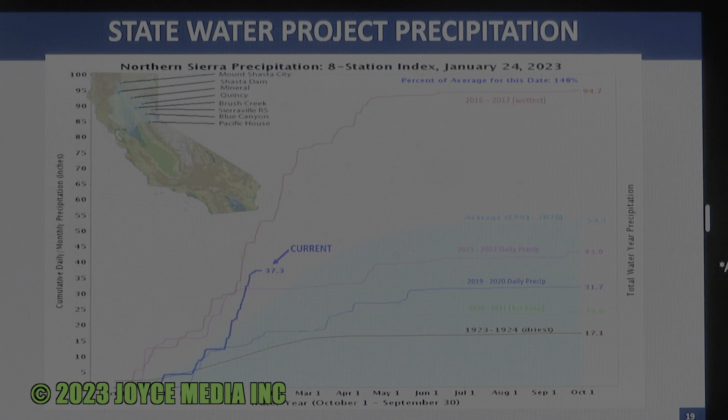Backing up a little bit. One slide, there we go.

All right, this is the Lake Oroville level. You can see we're currently at about 2.2 million acre feet of storage in Lake Oroville. We're currently 62% of total capacity. This reservoir holds about 3.5 million acre feet, and we're at 62% of that. We're a little over 100%, at 109% of historical average for this date. So things are looking pretty good in the Lake Oroville storage.

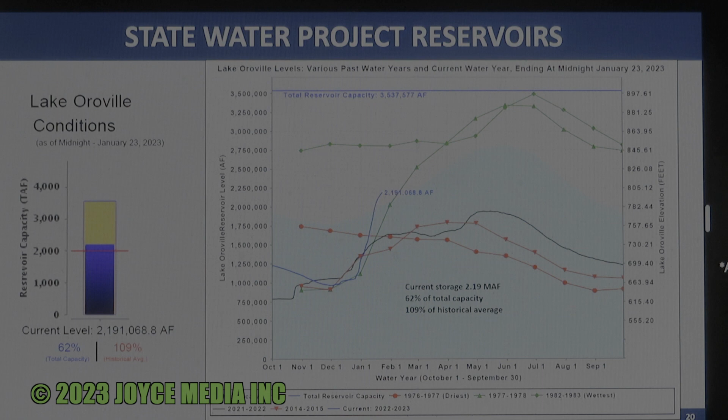Next slide. As you can imagine, they're pumping hard and putting a lot of water in San Luis Reservoir. There's talk about it spilling in March or April of this year if the trend continues. You can see that dark blue line is really taking off, and we're at 53% of total capacity and 74% of historical average. With the runoff continuing and heavy pumping, we anticipate this level continuing to go up at a pretty high rate.

There is talk about Article 21 water. It's kind of hard to believe - we're currently at 5% year, and they're talking about spilling San Luis and offering Article 21 water, maybe in March or April. So we're ensuring that all of our banking projects are ready to receive water once we get word of Article 21 water being available, and delivering as much as we can to the Westside Water Bank, Upper Amargosa, etc.

That will be part of our water supply plan, but that will be Table A water that we hold back in San Luis. We haven't cleared it out - we've depleted it. So San Luis is still full, with no more place to put the water in there. What are they going to do with the water?

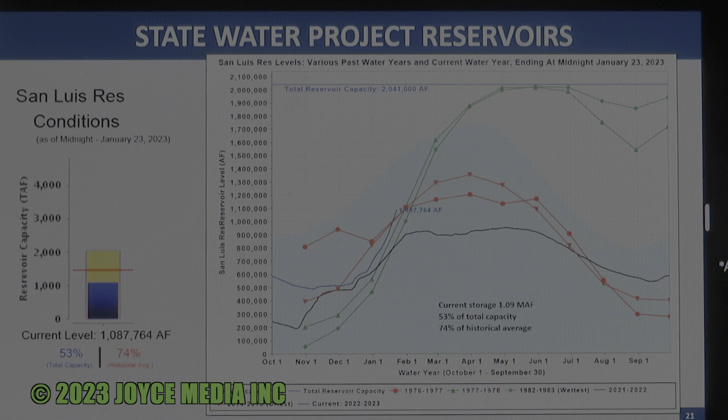How much water can we flow down that river? 10,000 acre feet of water? The project's designed for about 7,000 acre feet per year, and we own or have capacity to 50% of that. That should help, that's the most depleted area in that region. So you put a lot of water in there, that's going to really help out that whole area. Yep, exactly.

So when Article 21 goes, you open up Amargosa and put as much water as you can in there too. Yeah, along with the West Side Water Bank and the others. You just fill them all up as quickly as you can. Did you have a question, Rob?

Yeah, how is Article 21 water allocated? Is it based upon our yearly State water allocation? Project capacity. So every contractor has capacity within the state water project to move the water, so it's allocated based on that capacity. On capacity? Any idea what we possibly could get?

I'd have to look at our chart, but it's in the 200 acre feet a day range. Yeah, a little over 200 acre feet a day is what we could produce if we're able to put into the system, if we're able to max out all of our turnouts coming in.

But doesn't it also depend on where it's being taken at in the aqueduct? Like further west, we can pull more water out of there than we can further east. That's correct. The 200 acre feet is the max we can do out of the west feeder, and then you'll add Amargosa, the east side, as smaller portions that could be added to that 200 acre feet. Did Big Rock Creek qualify for that? It would, except we aren't able to put a lot of water through there because of the other issues that we have with that.

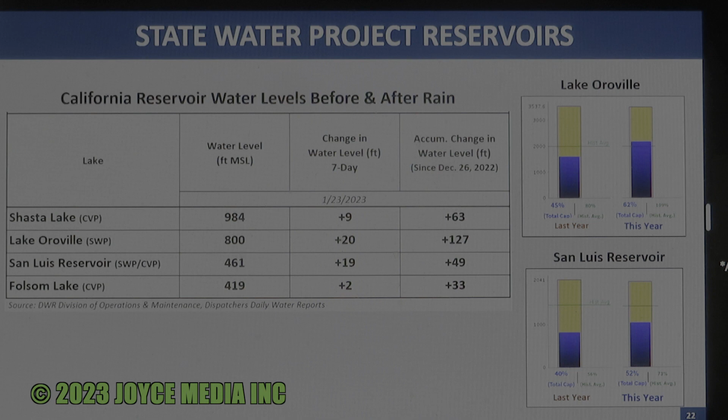So the trend continues. Hopefully we'll see that in the coming months. Next slide.

Today there was supposed to be what they call a State Water Project Contractors Operations Committee update, where we get the latest on the snowpack and hydrology and the analysis they go through to determine updated State Water Project allocations. That meeting got moved till Friday, so we anticipate on Friday learning our new allocation number. As I mentioned earlier, we're currently at 5%. There's talk about it going up to 15, 20%, possibly by the end of this week or early next week. So really good news for the agency.

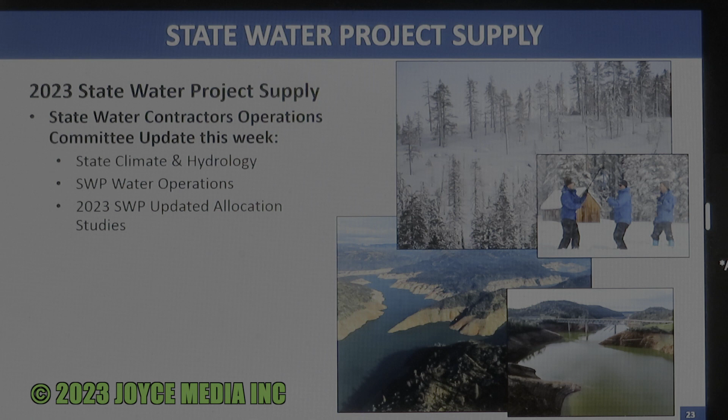At this point we're going to switch gears. I'll invite John Bozigan, our operations manager, up, and he's going to talk through our Quartz Hill Water Treatment Plant winter maintenance project.

All right, good evening everybody. So if you remember, at the last board meeting Matt told the board that we shut the Quartz Hill plant down for annual maintenance. We thought this would be a good opportunity to tell the board why we shut the plant down and some of the things we do while we're shut down.

This first slide, let's go back one. Okay, so this first slide is an overview of the Quartz Hill plant, and you all know where that's at. It's the Quartz Hill plant here.

We are a 90 MGD facility. We expanded the plant in 2009 from 65 to 90 million gallons a day if we're running at full capacity. Most of the time the plant is submerged - all the channels, all the clarifiers, filters, everything's submerged, so you can't really get to anything to do maintenance.

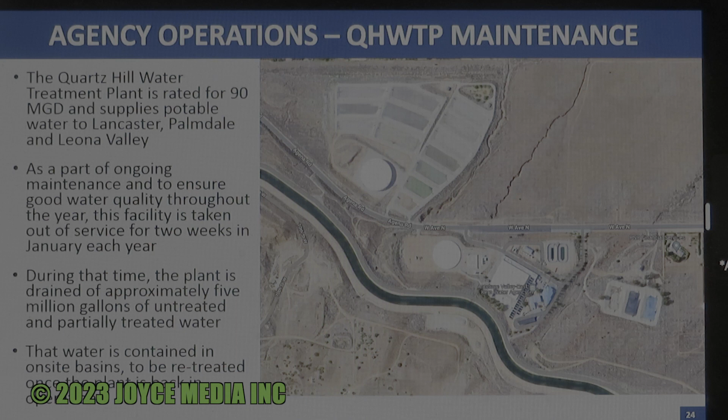So we take it offline every January for two weeks, and we drain - depending on how many clarifiers are full at the time - we can drain up to 5 million gallons of water out of this plant. And where we put it is in these wash water basins, these drying ponds across the street, which you've seen. When the plant is put back in operation, this water is pumped back to the headworks of the plant and retreated, so none of it gets wasted, which is a good thing.

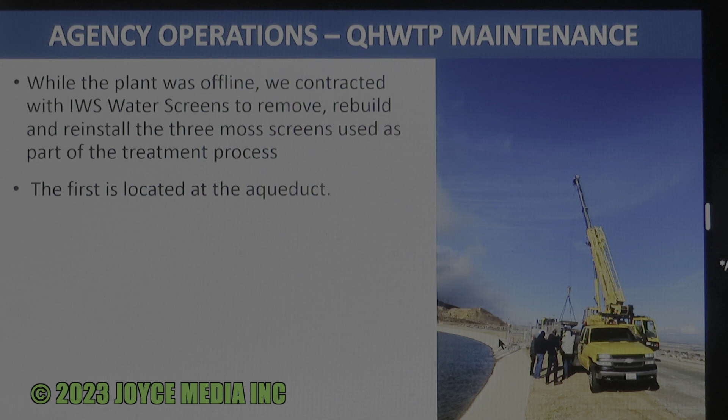Okay, so we have 3 moss screens at the Quartz Hill plant. One is at the aqueduct - that's this one here. This was installed about 15 years ago. And the other 2 are at the headworks of the plant.

So the water comes from the aqueduct, goes through that first moss screen, then through these secondary moss screens in the plant. What they do is catch a lot of the solids in the aqueduct - algae, clumps of moss, fish, tires, things, whatever's in the aqueduct. We don't want it coming into the plant.

So we contracted with IWS, International Water Screens, to pull these screens because during the summer months they run 24/7, so you can imagine there's a lot of wear and tear on them. This is a great time to pull these screens. They take them back to their shop, rebuild them, and put them back in place, so we're ready to go for another year.

Usually it's just the wear parts on the screen, but probably every 5 years we have to fully rebuild them because they do take a lot of beating.

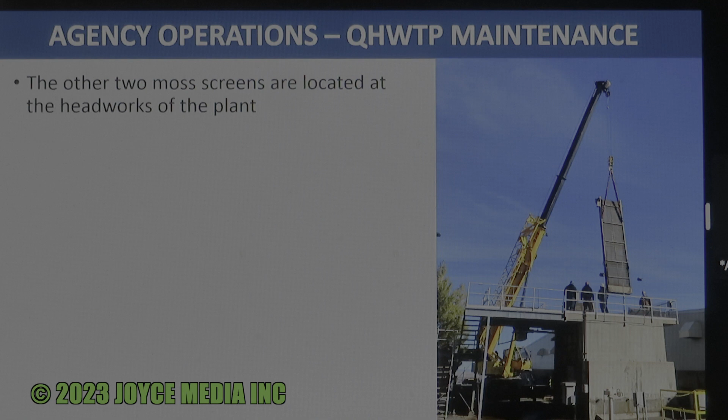Okay, so you can imagine, you're running this plant 50 weeks out of the year, and a lot of organic matter - we use the term sludge, we're not supposed to, that's a wastewater term, but we'll use it today - a lot of sludge gets in parts of the plant that we can't get out.

Back in the day, operators would take fire hoses and squeegees and spend about a week and a half, and we'd clean the plant up pretty good, using the interior drains and so forth. But when we expanded the plant, it changed the configuration, a lot of the channels, and we can't get in there to do that type of cleaning anymore.

So we hire an industrial services company, ERS. They've done it for several years and do a great job. They bring in these big vacuum apparatus, these trucks, and spend about 3 or 4 days going into these channels that we can't get to, pulling all this organic matter out and getting it real clean. Then we have great water quality for the rest of the year.

If we were to leave this in the plant, you would start having taste and odor problems in the water - it'd be a big problem. So this is part of what's done every year.

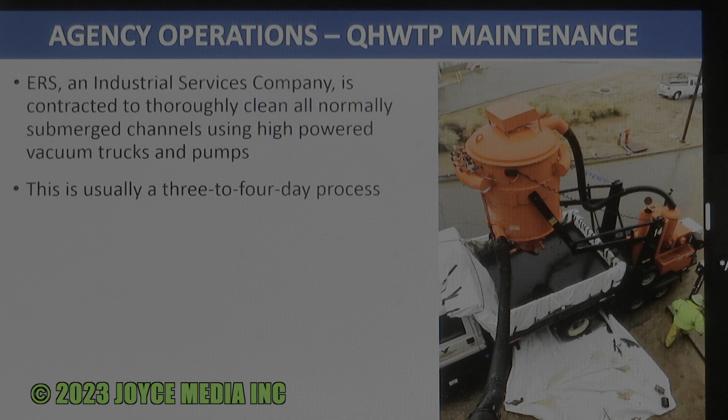Staff still can get into certain areas of the plant with fire hoses and squeegees, so we still do some of that work. Okay, this is a channel that's been cleaned. I mean, look at it - let's say you could eat off that floor, but I probably wouldn't. But it's clean comparatively to what it was.

So that's the filter influent channel. That's the water that's gone through 75% of the treatment process - it goes into this channel, and then goes into the individual filters from there.

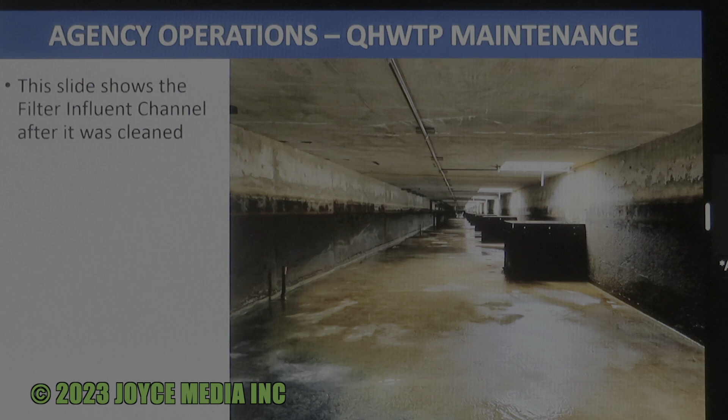Okay, this is our clarifier effluent channel. And it's also, see, this could be like a great escape room if we were renting out part of the plant while it was off. But we don't do that.

So this is a channel that was built in 2009 as part of the DBP project. And this takes clarified water through this long, narrow channel, about 350 feet long, to the ozone contactor - that's the midpoint of the plant where we add ozone to the water.

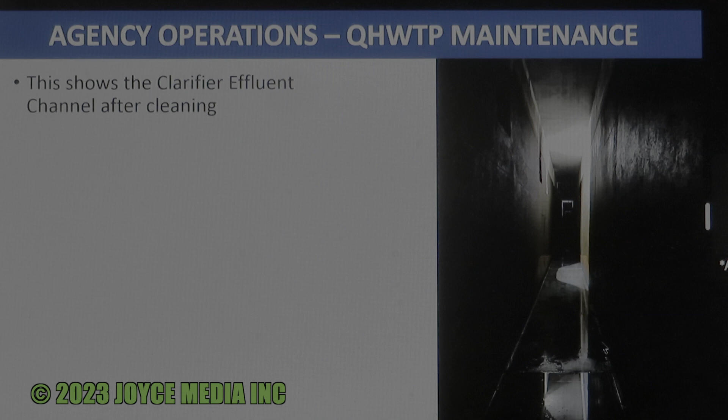And that's, again, very clean. They do a great job. And let's see, next slide.

Okay, so the Quartz Hill plant, any treatment plant, is a huge concrete structure. That's what it is. And when you build a big concrete structure, what does concrete do? It cracks. Well, to prevent the cracking on big structures like this and bridges you see on the freeways, they leave what's called expansion joints or construction joints.

These are joints intentionally left between concrete panels, and they're filled with this expanding material. This flexible material allows the plant, the concrete, to expand and contract seasonally, and it eliminates that crackage that's so prevalent with concrete.

Over the course of years, you can imagine it's like caulking. It shrinks, it pulls away, and then what happens is the water can undermine the concrete structure. This shot here is at the bottom of a clarifier. So if water gets under here, it can actually cause lifting of the concrete.

So what we've done the last several years is hired a company called Elite Concrete Restoration. They come in, remove the old material, prep the joint, and put in new material. Honestly, it should be good for 30 plus years if it's done correctly.

Yes, Frank? Then remove the caulking, is that what they do? Yeah, put new caulking in. They fully remove it, put in what's called backer rod, flexible backer rod, and then apply this material called Sikaflex. It's NSF 61 approved for water and adheres really good, but really it's like anything - it's like painting a house. It's all in the prep. The better prep you do, the better job you're going to have.

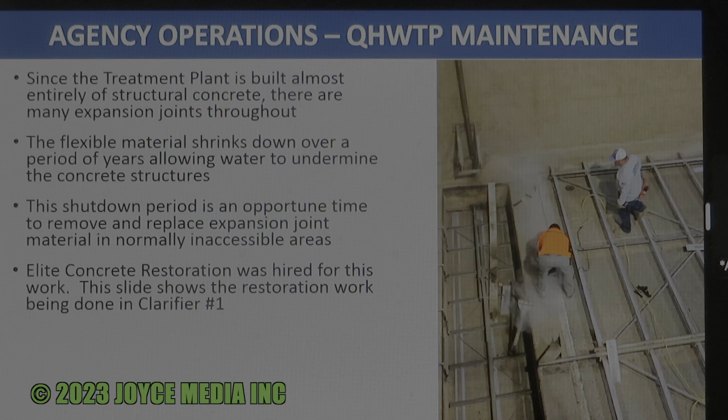So they spend a lot of time prepping and lay in this material, and we expect it to last 30 plus years. But keep in mind, we have lots of facilities, and we can only do so much at each facility per year. So this is going to be an annual event at all of our facilities till we get it all done.

This next shot is the filter effluent channel, and we had a massive leak. This is the bottom, the floor - they've already done that. You can see this vertical seam - we had a huge leak here where water was actually leaking outside of the plant. We had to take some kind of hokey measures to stop that until we could get this plant shut down, but we did stop the leak. They came in - you can see this old section has not been removed yet, but they have removed and replaced the rest. So that leak has been repaired, thankfully.

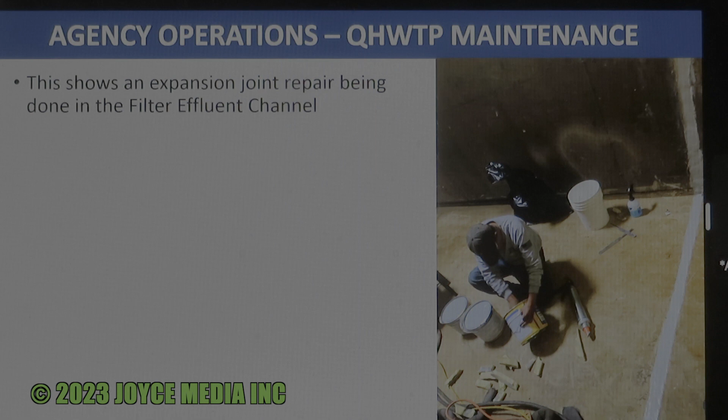Okay, one of the biggest and most challenging things we do is valve replacement. Quartz Hill Treatment Plant has 24 20-inch filter effluent valves - each filter has an effluent valve. And these valves, the original ones, are almost 50 years old. When the plant was expanded in 1989, those valves are 30 plus years old.

So once these valves start leaking, here's what happens: when you take a filter offline to backwash it, you're isolating the filter, bringing water up through it, backwashing it, removing all the impurities and sending it out to the wash water basin. But if these valves leak, you're sending some of those impurities into the filter effluent channel, which goes straight into the clear well. So what we've done is start a program to replace these valves.

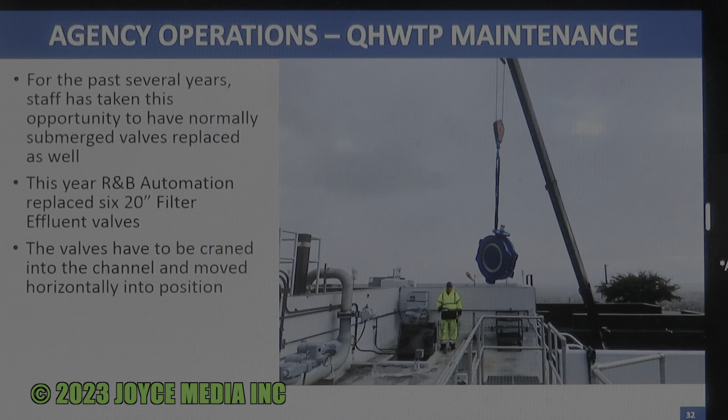R&B Automation - we've used them for many, many years. They have the expertise to do this and they keep the valves in stock. What he's doing here with this crane is taking this valve, dropping it through this hatch, down about 17 feet. Then they have to horizontally roll this valve on a cart into position, and once they do that, they get it bolted up. See, it's all bolted up.

And they have to fabricate - this is a stainless steel hub, because you can imagine 50 years ago the valve stem used different sizes. So you have this torque tube that goes up to the actuator, and the interconnection is this steel hub. R&B has an internal machine shop - they make these hubs and machine them to fit the valve.

This is the owner of the company, Brian. He comes out and welds that. They have to position everything so it's lined up, and then he does the final welding, puts it all together. He's got a great crew - they're very, very good - but he is a hands-on owner, and he makes sure with Avek he's always on site to do this type of finish work.

There's a question. I see right about halfway up that pipe, rust and stuff - do they paint that or coat that or anything? Well, the problem is this is in a filter effluent channel, so the water that goes through those valves is fully treated but not disinfected yet. So it's very difficult to coat these with anything that's NSF 61 approved.

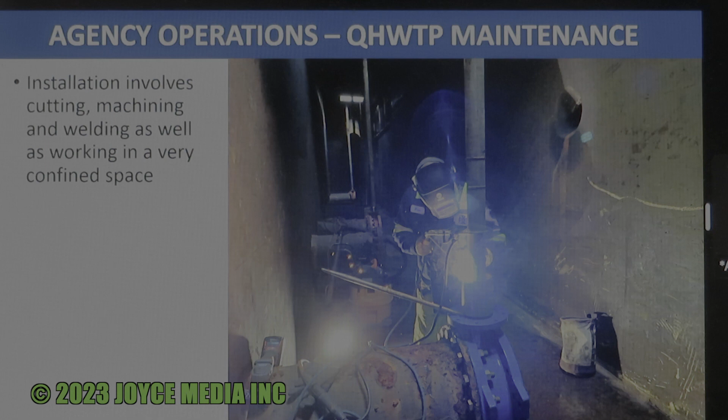There's one way would be to demo the concrete, put a new pipe, form around it, put a water stop, and pour in place. That would be very expensive, very disruptive.

So we tasked R&B to come up with a fix. How are we going to fix this? Because in the future, this has to be done.

So they came up with an idea, and it's all the same for all of them: they would cut this pipe off flush with the wall, build a 1-inch thick stainless steel plate, and anchor it to the wall with a thick gasket. Then they would take new pipe, weld it to that stainless steel plate, and weld a new flange on and connect the valve.

That way, it would be actually cheaper than doing demo work. And being stainless steel, it's going to last longer than we are. And it's quick, fairly quick to do.

So we'll probably be looking at, I would say, in the next 3 or 4 years, beginning that process of replacement, just start doing like one. We can only keep the plant off for about 2 to 3 weeks, really. So we tasked R&B to say, okay, if we did this, how many could you do in that period of time? If they can do 6 of them a year, that'd be great.

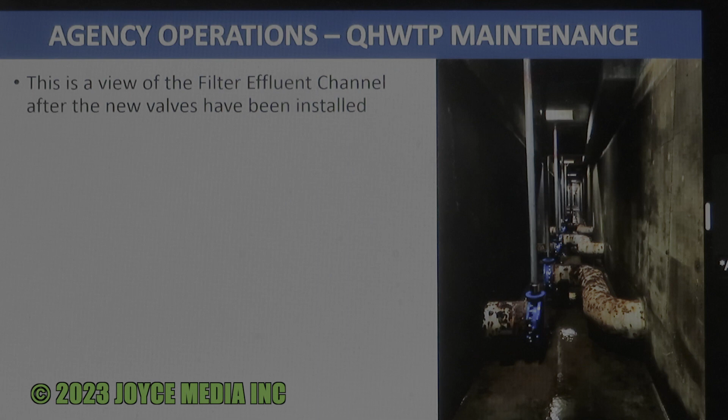Right, and Frank, that's a great segue to this last slide.

So what else do we do when we shut down the plant? Well, our operations and maintenance staff goes through the plant front to back, top to bottom, and we look at things that are going to be needed in the future so that we can plan. They're going through the plant this year with ideas for the next asset replacement budget that we're going to bring to the board for passage for the new fiscal year.

But that's exactly what we do. We look forward because we have to keep our facilities in tip-top shape. And with the very forward-thinking board that we've had for many years, and with good financial management, we have reserves to do this type of work and keep our facilities in excellent shape.

And that builds, it's not just for water quality, which is most important, but it builds public trust. When they see facilities that look pretty much brand new and they're 50 years old, it just adds to public trust. So that's what we try to do. And again, we'll be bringing things to you in the future to meet those goals.

I'll be happy to answer any questions. Brand new, yeah, brand new. And there's submerged service, which are special valves. So yeah.

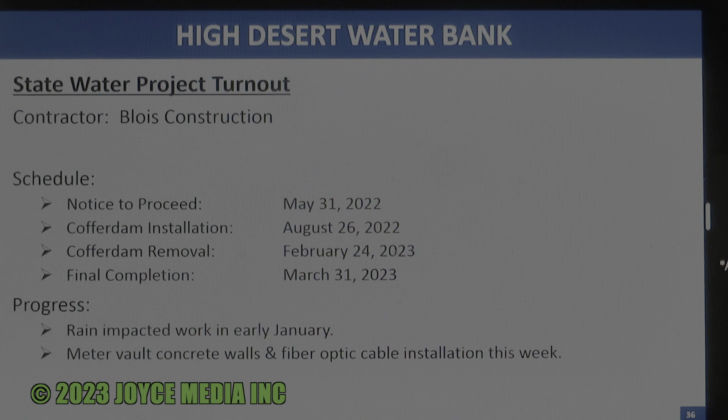Some of the progress out there we're working on this week is the meter vault - they've got everything formed up to start pouring the concrete walls for the meter vault. They're also beginning work on the fiber optic cable to be installed along the aqueduct, which DWR added to this contract so they can communicate and see what's happening with our turnout once it's built and operational. I've got a handful of photos here showing some of the work that's been done.

You can see the aqueduct down here at the bottom, and this is the cofferdam - you've all seen photos of that before, a very large structure. Within that cofferdam, you can see where the aqueduct lining has been cut, and this is the new turnout structure, 2 sides. Going into the middle of the picture, this is the location of the metering vault - they've got the walls formed up. They'll begin the concrete pour and build that up. To the right, a bit difficult to see, is the foundation for what will be the control building for this turnout.

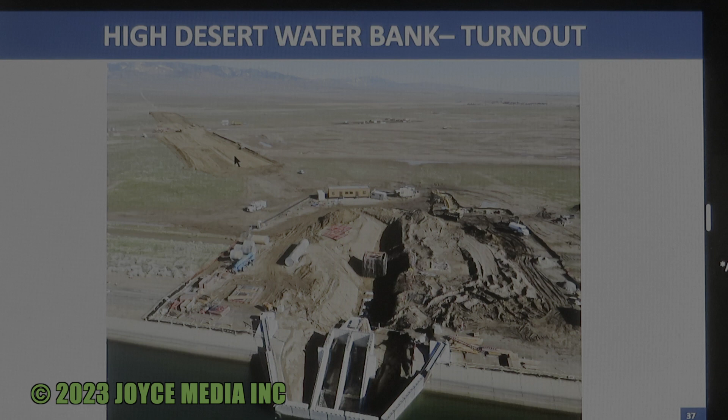Way in the background, not part of this project, but I've got an update on that too - you can see Nicholas Construction, who's working on the recharge basins, has started some rough excavation for where the pipeline is going to go. So some good work occurring out there.

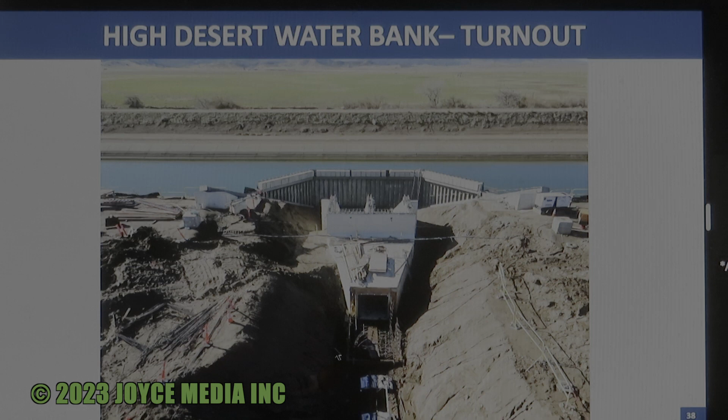What happened to my clicker? Oh, there we go - another shot. This is another angle of the aqueduct turnout structure. You can see on the other side where the gates are going to be, and then that water comes in, funnels through here, and they'll be connecting an 84-inch diameter pipe to the end of that structure, then through the metering vault coming to the bottom of that picture.

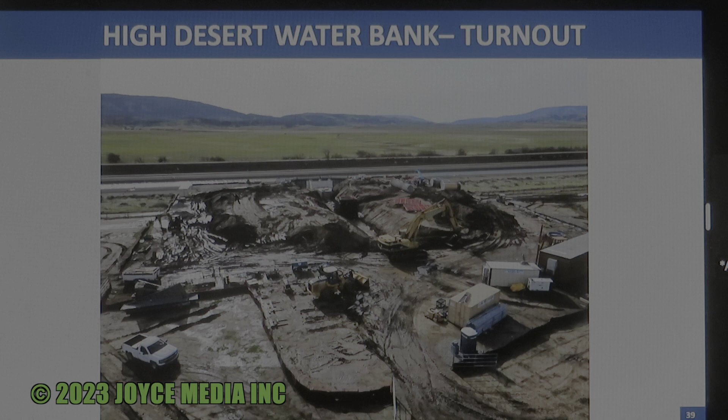Mentioned the rain - that site for the turnout got a little sloppy. You can see in this picture some standing water. They got a lot of rain out there. You can see from this trench where they're going to connect that 84-inch pipe to the metering vault structure, there's water completely in that trench. So they had to take a couple days - this looks like they're pumping water out of that trench, but they had to let it dry out a little so they could clear out the muck and get back to firm foundation to continue.

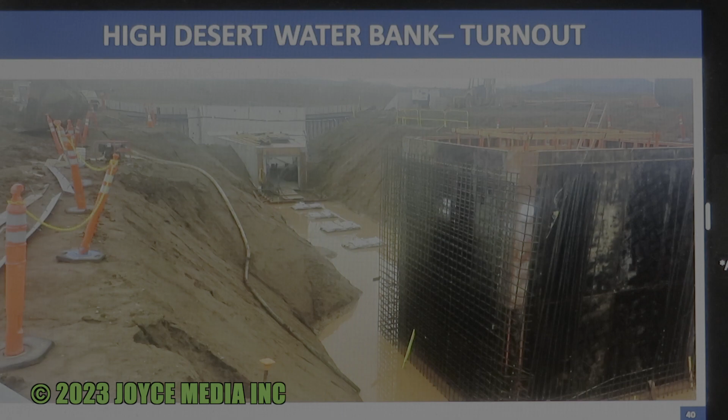So they're totally done, and we'll be coming to the board pretty soon for authorization to close that contract out.

For the recharge basins itself, the contractor performing that work is Nicholas Construction. They began work last summer. They had an early milestone of completing what we call the stage 1 recharge basin area, the southeast quadrant of the project site. Their milestone to complete that was mid-2023, and they're looking like they're going to hit July 10th for that area to be completely operational. We can store quite a bit of water in that early phase of the project.

If the hydrology turns out and we are getting some Article 21 water, maybe Metropolitan fills up some of their priority places to store water - maybe they have a little extra coming through the summer and fall months - and they might want to test out their new projects. So we should be in a good position to start that.

And then Justin, would this be a good time to ask a question? Sure, yeah, anytime. This is Shelley.

Is there going to be a change order or additional cost to pumping out the water from the rain? No, we don't envision a change order for the pumping. The program or construction management team got a schedule update from the contractor recently, and they're looking at what type of impacts the rain had on their schedule, but there should not be any cost impacts. They may claim a few days for weather delays, but the construction management team is still evaluating that. Okay, thank you very much.

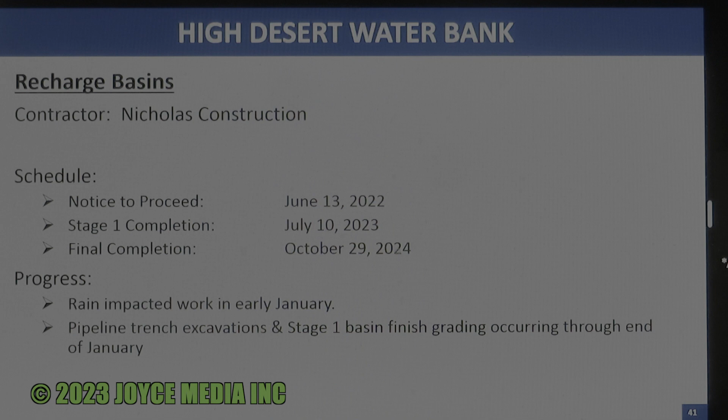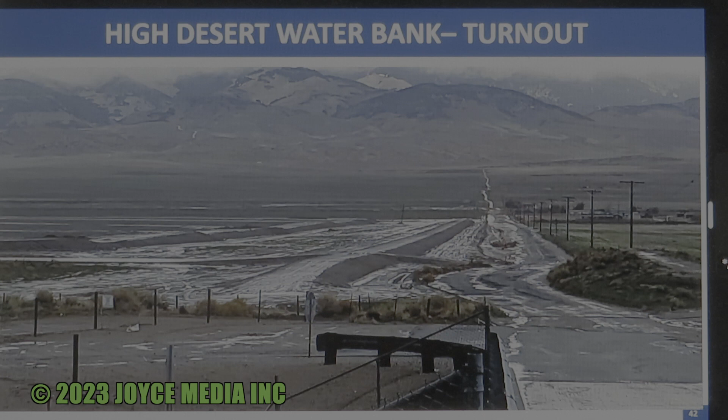This is 280th Street West looking to the north. You can see, here's 280th Street going up, and you can see that site out there - when it gets rainy and wet, it gets pretty sloppy. There's been some folks that almost got stuck in the mud. That site's dirt roads get pretty slick and sticky.

Here's maybe the first recharge in our new recharge basins. We got some rain out there, so you can see it's all pooling in the appropriate spots of the recharge basins, and hopefully was gone very shortly after it pooled there. Are we taking credit for that storage? Yeah, I wish we had a way to measure that.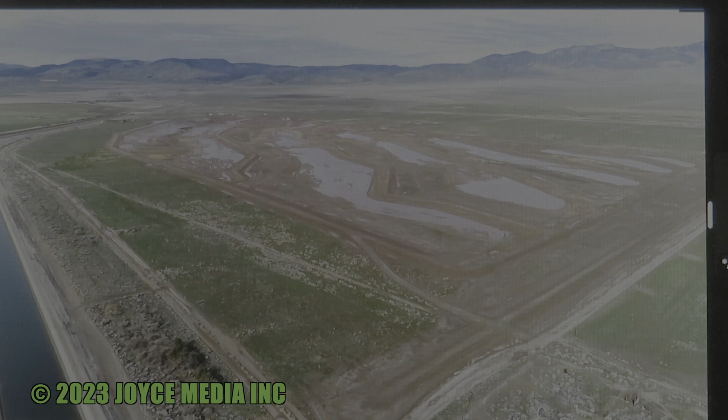And then this is the northern area recharge - what I mentioned is called the stage 1 recharge area. This is from the corner at 280th Street and the Aqueduct, looking to the northwest.

And then this is kind of looking in the opposite direction, from the northeast corner looking southwest. This is what we call the stage 2 area. Nicholas has started grading of those recharge basins up there, and got a little bit of water in those ones as well.

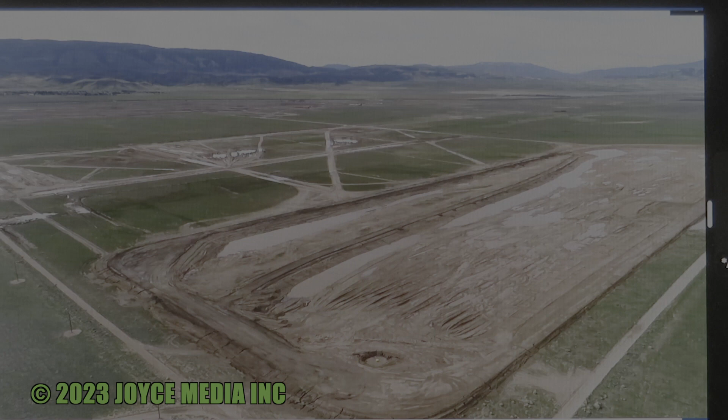Just another photo of some muddy water in those basins after the rains. Yeah, starting to recharge. We are, exactly.

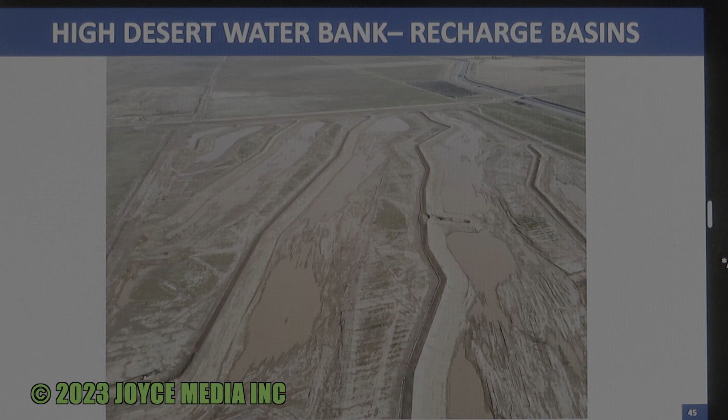That's a similar photo to what I showed before, but this one has a better angle of the trench excavations they're doing. These are pretty wide. Some of the ultimate pipe trenches will carry pipe that's 96 inches through some of this area, so pretty large pipe and pretty deep excavation. They've started with a shallower, wider cut before getting too deep and having to start shoring those trenches up.

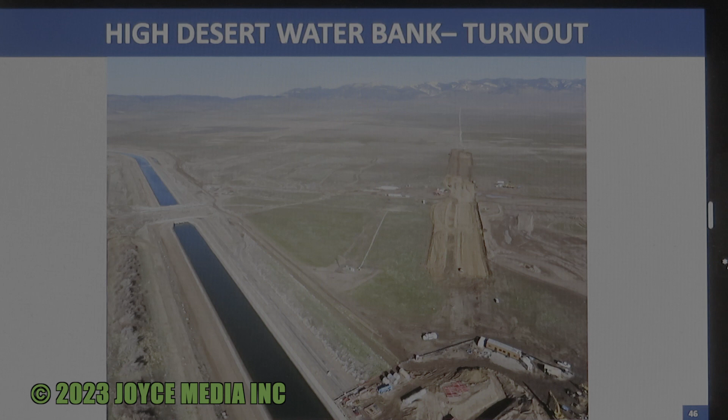I think that's the last photo I've got. So if there are any questions on that brief update, I'd be happy to answer them.

Is there any way to expedite stage 1 by pulling crews off of stage 2 so we could start storing earlier? No, not really — it's all the same thing, and really the limiting factor is getting the pipe on site and installed in the ground. Yeah, I figured you'd already thought of it. All right, thanks.